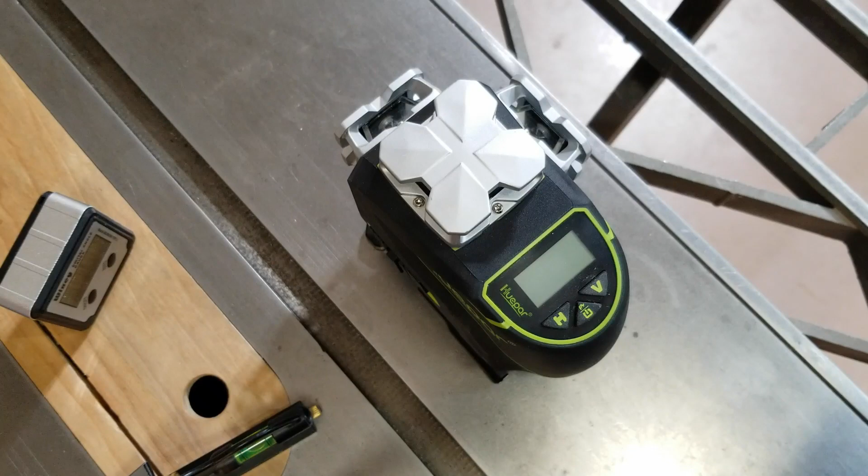What would you do if you turned on your Huepar self-leveling laser level and it started beeping like this? Your initial assumption might be that your laser level is not sitting flat and it is tilted past the limits that activate the alarm tone. For this Huepar S04CG model, any tilt over 3.5 degrees from true level will activate the alarm.

But what if your laser level is sitting on a level horizontal surface and the alarm tone is still sounding? It could be that the display is out of calibration and requires reset. As you can see from the readings on my laser level, even though it is sitting flat, the x-axis is showing negative 1.4 degrees and the y-axis is showing 4.1 degrees, whereas they should both be reading 0 or close to it. Now, there is something I can do to bring the readings back to 0, and that is to press and hold the V button for about 5 seconds, like this.

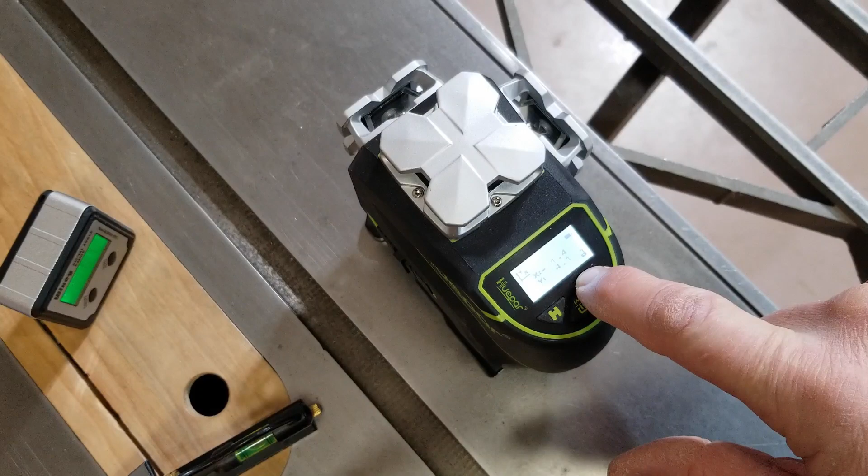Now, some of you might think that I have just recalibrated my laser level, but you would be wrong. To properly calibrate a self-leveling laser level, you have to do a physical adjustment to the internal pendulum. I have a complete video tutorial on how to do this, so check out the link here to view that video.

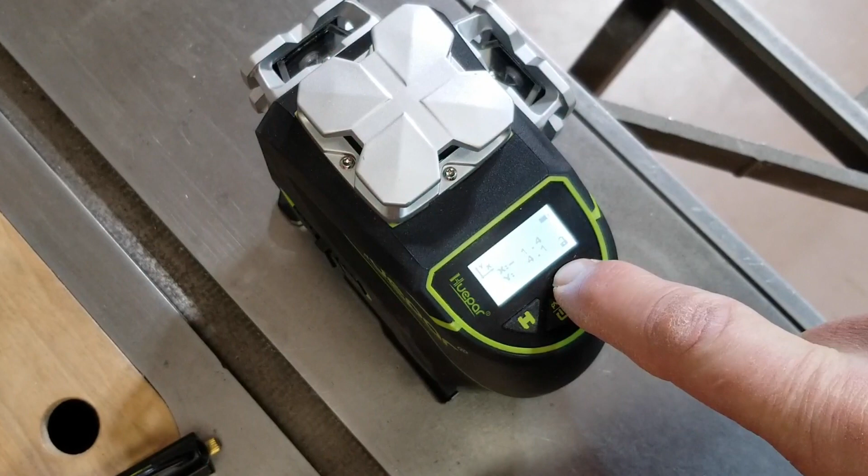So what happened when I held down that V button? All I did here was reset the display to 0, but my laser level may still be out of calibration due to the internal pendulum being off-center, allowing it to prematurely hit internal bumpers in the unit and give erroneous readings of being level when in actuality the horizontal laser plane is tilted.

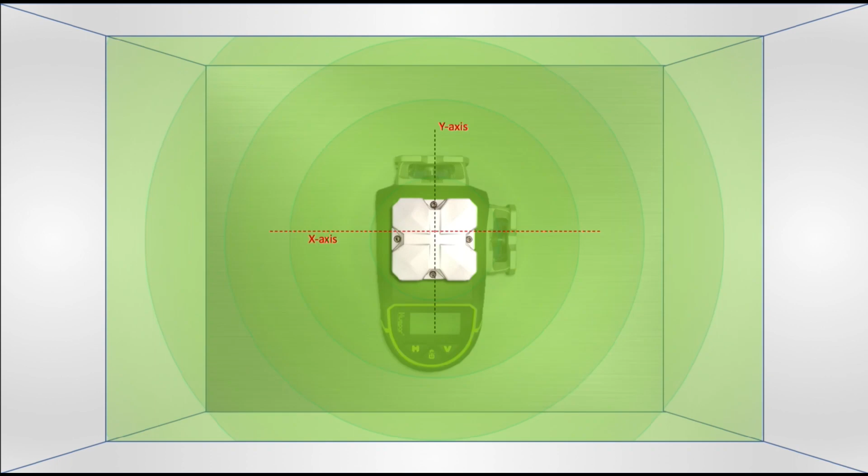To make this easier to understand, let me demonstrate by first placing a box on a level surface to simulate a room with a completely level floor. I then place the laser level inside the simulated room and turn it on. If the laser is accurately calibrated, it will emit a horizontal laser plane 360 degrees around the room, and both the x-axis and the y-axis will equal 0. Additionally, the height of the laser measured on each wall from the perfectly leveled floor will be exactly the same. A, B, C, and D are all the same height.

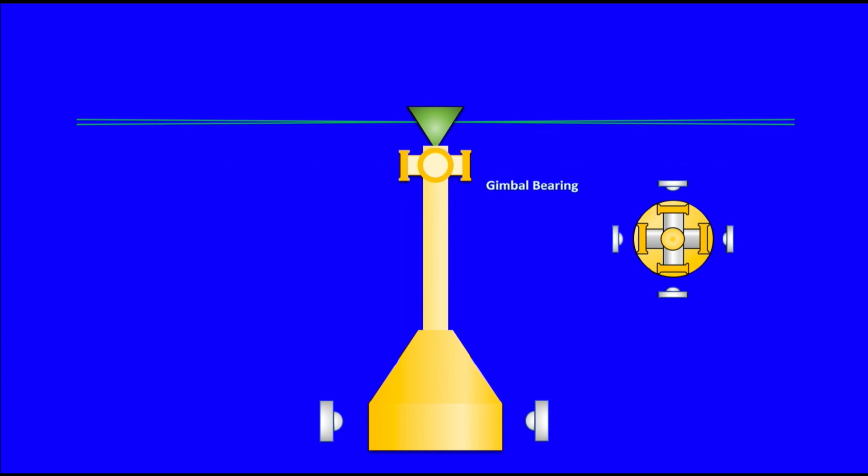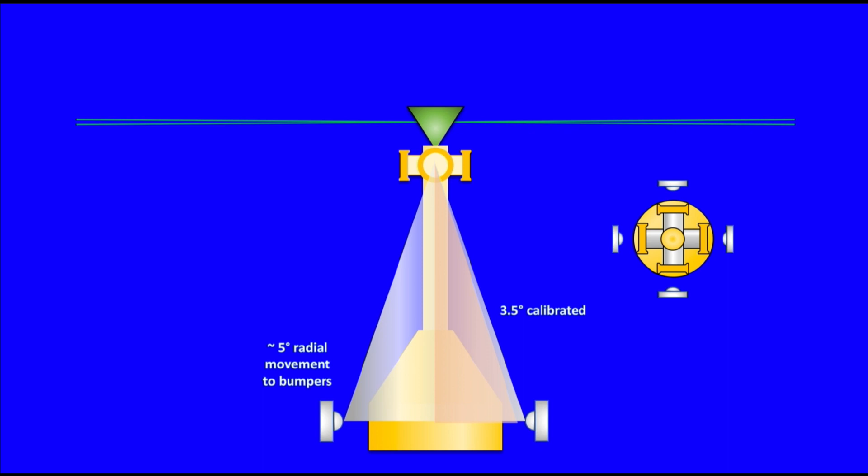Now, inside the laser level is a pendulum mounted in a 2-axis gimbal, which allows the pendulum to swing freely about its horizontal x and y axes. There are also internal bumpers that prevent the pendulum from swinging more than about 5 degrees radially in order to prevent damage to the delicate assembly. However, since the leveling compensation range is set to 3.5 degrees plus or minus 0.1 degree, there actually remains only about 1.5 degrees of correction before hitting one of the bumpers.

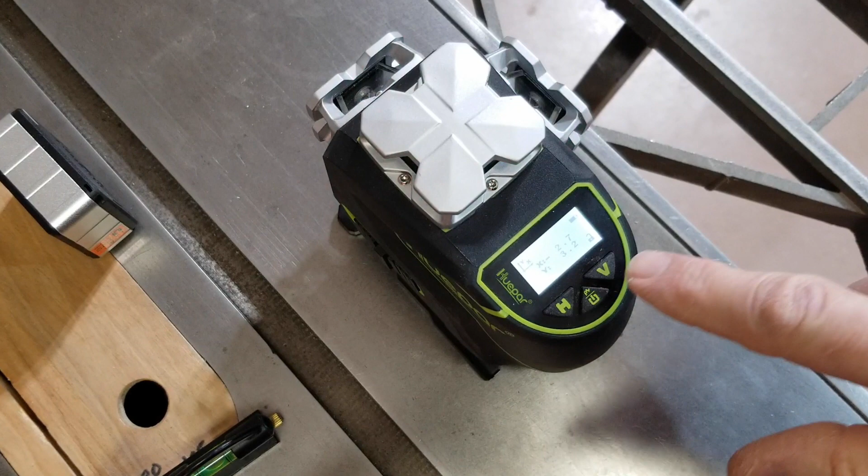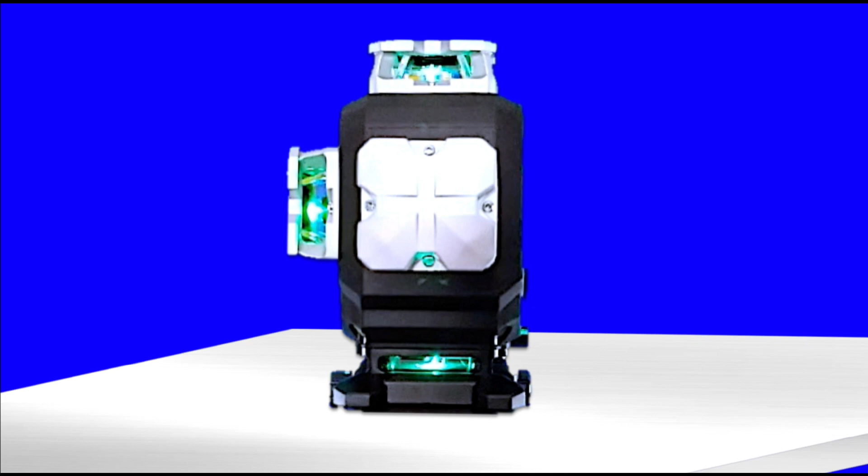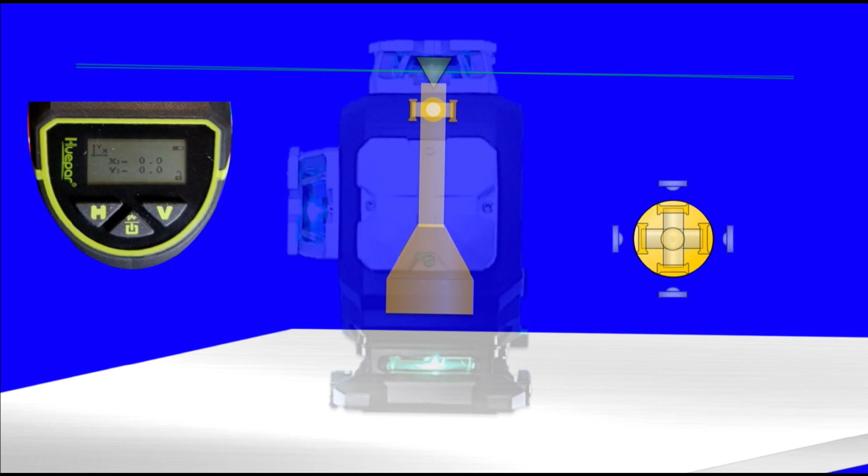Doing a long press on the V button could actually be detrimental and cause the laser level to display erroneous information. For example, let's assume you long press the V button with the laser level on a flat surface, but you're unaware that the surface is actually tilted 2 degrees. The laser level will display 0 for the x and y axes and the laser will be at true level, but in reality, the range of the x-axis has shifted and only provides 3 degrees of pendulum motion to the right side until it hits the internal bumper. This is not necessarily a problem yet because the laser is still able to self-level.

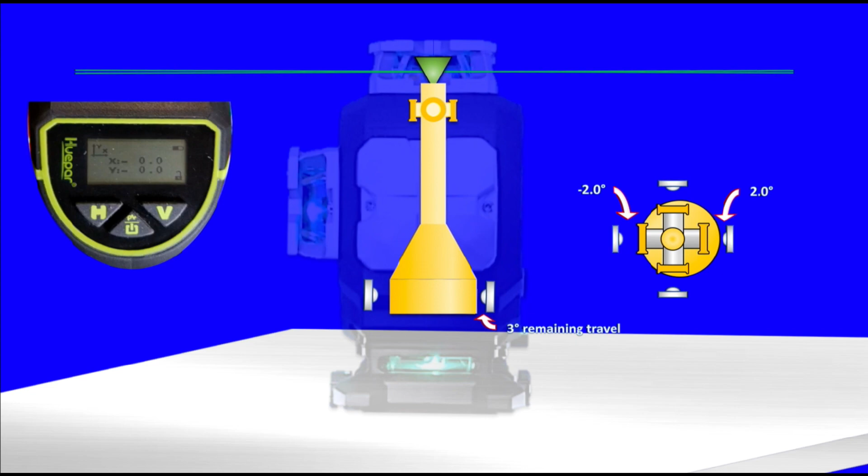But let's put the laser level on a tripod at a work site. As you probably know, getting a laser level to perfect level across the x and y axes is not easy. Try it if you don't believe me. That is why manufacturers allow for 3 to 4 degrees of pendulum swing so you don't have to be so precise in setting up your laser level. And an alarm tone will sound if you go beyond that range.

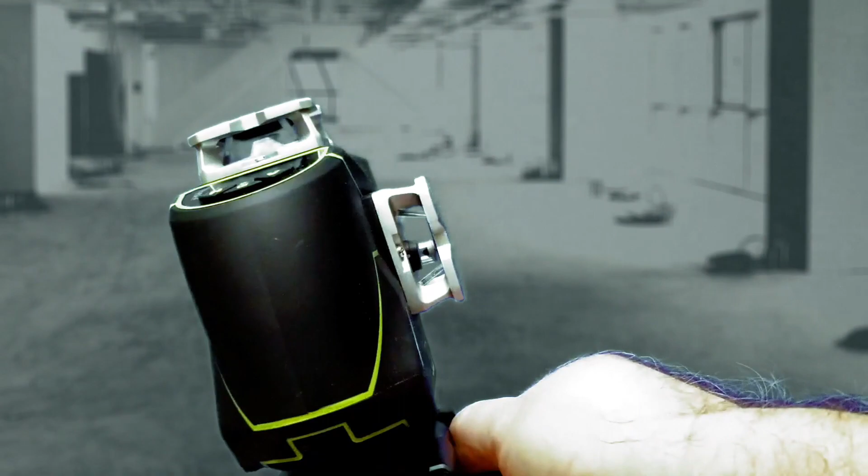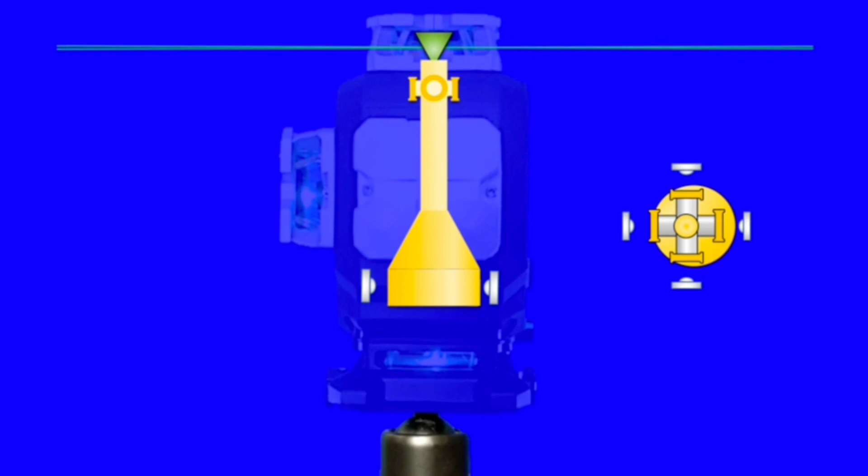For this Huepar laser level, the leveling compensation range is 3.5 degrees. In this example, we have placed the level on a tripod and the display shows the x-axis is 3 degrees from level. However, the laser level is actually 5 degrees from level, but the alarm does not go off because you have reset the display, and the alarm will not go off until it is 5.5 degrees tilted to the right and conversely 1.5 degrees of tilt to the left before the alarm will sound.

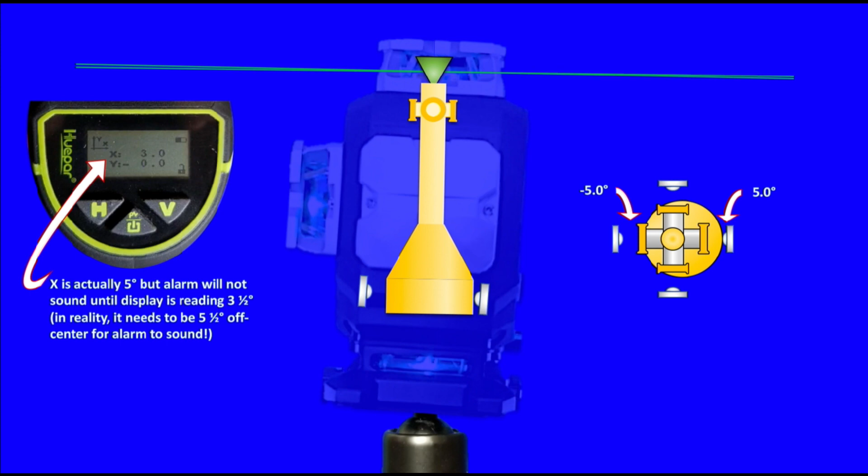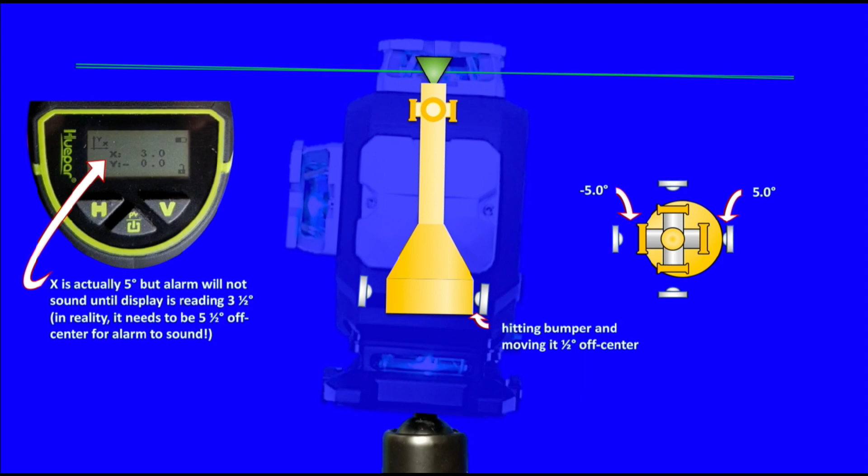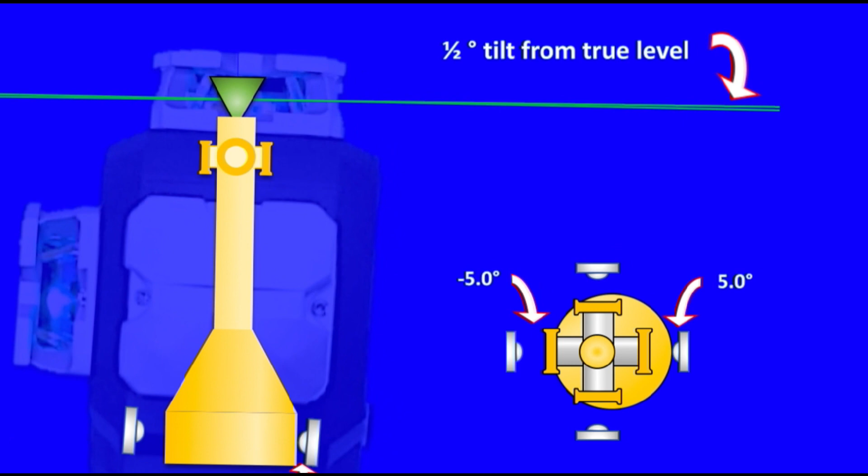But that's not the worst part. Because the bumper is located just 5 degrees from level, any movement greater than 5 degrees tilt will cause the bumper to contact the pendulum, preventing it from swinging freely, and it will no longer self-level. In this example, the display shows it is only tilted 3 degrees, so the alarm does not sound, and the laser is tilted 1/2 degree from level. That may not sound like much, but on a 5-meter wall, you would be 4.5 centimeters off level.

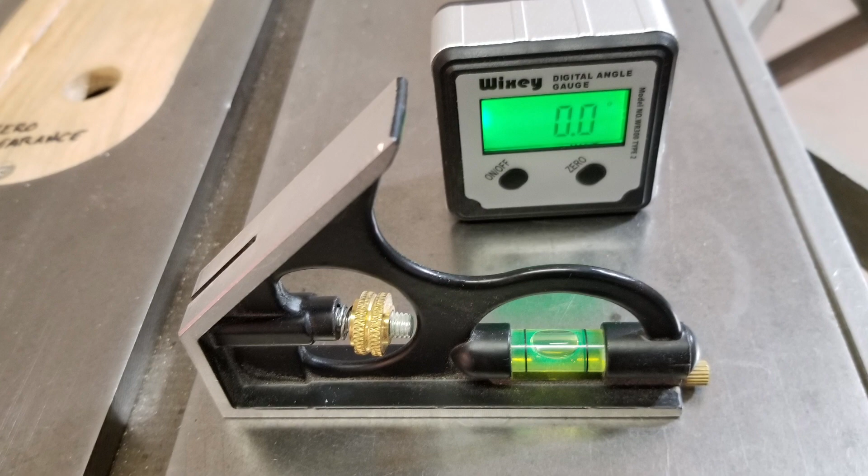So before you long press that V button, here is the proper way to check if it even requires it, and then how to correctly do it. First, make sure the laser is sitting on a perfectly level surface. Check the surface in all directions using a calibrated angle finder and/or a spirit level.

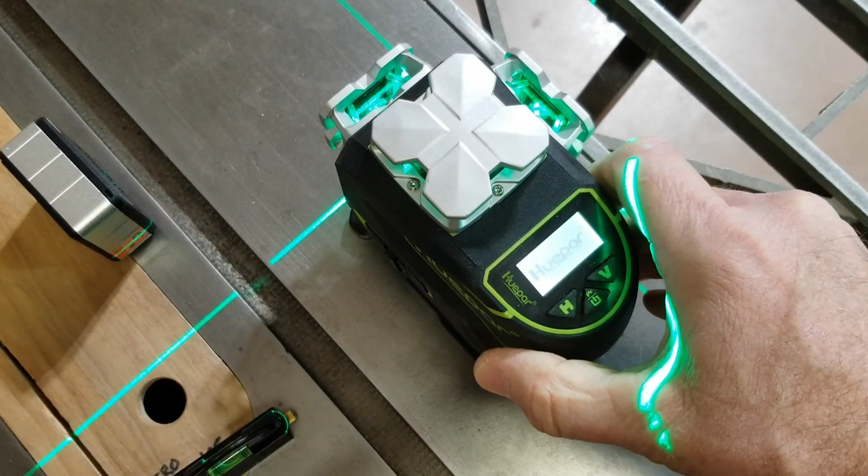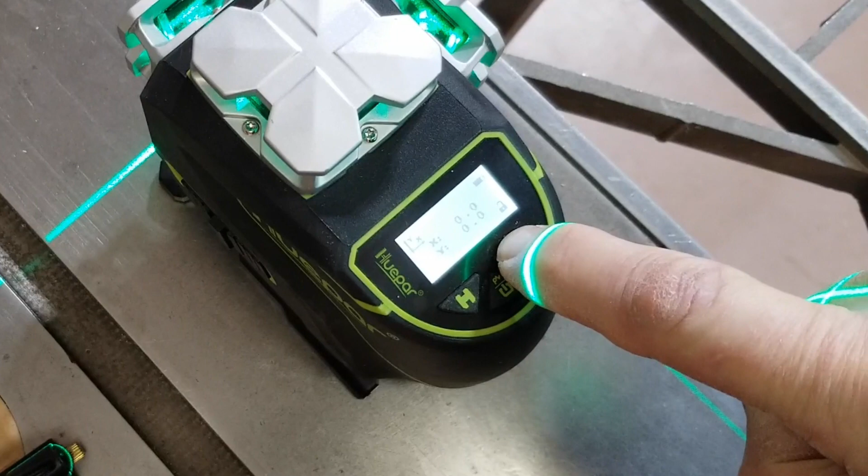Then, with the laser level on the perfectly level surface, turn it on and check to see if the x and y axes are reading 0. If not, then long press the V button to reset them back to factory setting of 0. One last thing I'll mention is that the x and y 0 axis setting is in reference to the base of the laser level. On the base are rubber pads, and if these get worn, then your x and y axes will probably not read 0.

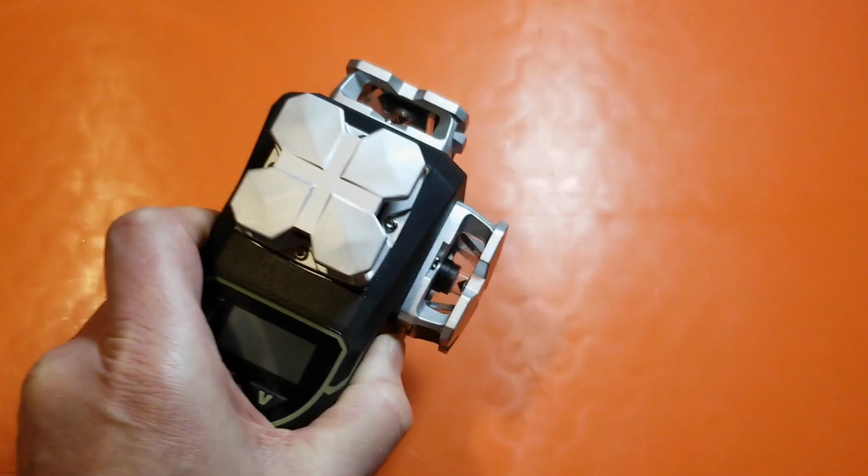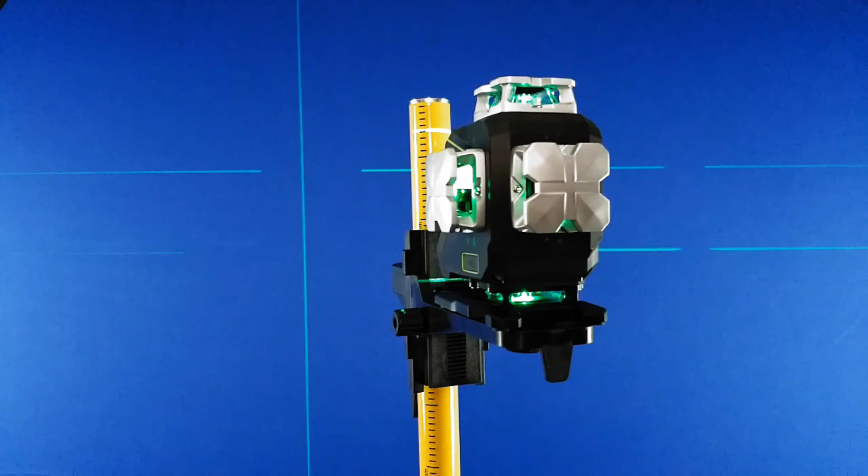Well, I hope this tutorial helps you to better understand the function of the long press of the V button on Huepar laser levels. It does not recalibrate your laser level, but only resets the 0 settings of the X and Y axes. Chances are you will never have to adjust them, but more importantly, do not long press the V button unless your laser level is on a perfectly true and level flat surface.